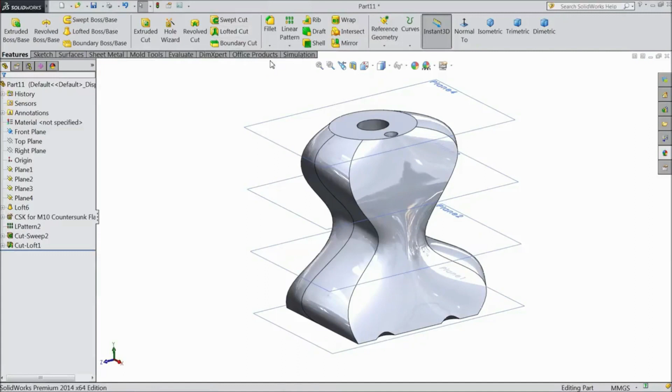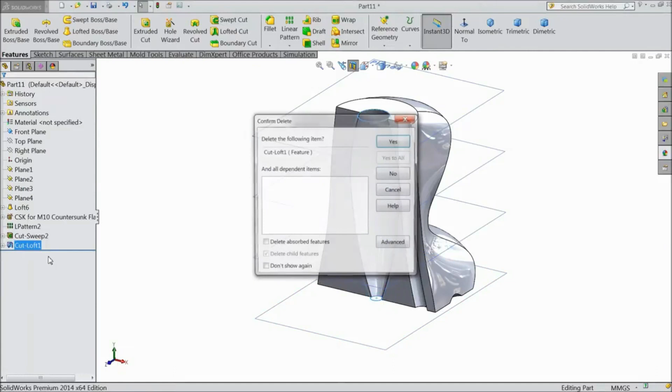Now we are going to see guided lofted cut. In the last lecture we created this lofted cut. Now we will see what is guided lofted cut. So let's see. First delete this lofted cut: right click, delete. Yes. Now we deleted this lofted cut, but our previous geometry is still there. We will use this geometry and we will see how to use guided lofted cut.

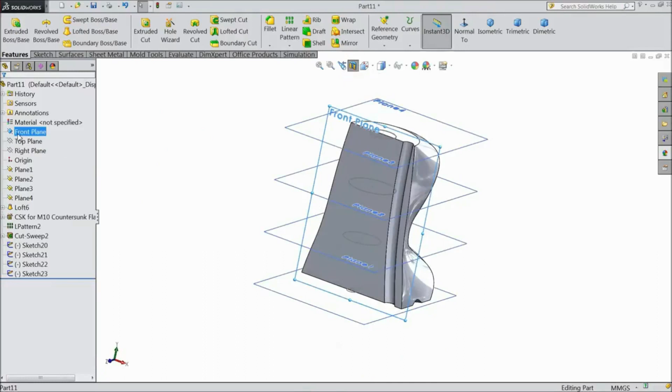So select front plane, sketch, select normal. Now select all these circles. First we will do one thing, hide all these planes. Right click and click here, hide. Now the circles are visible.

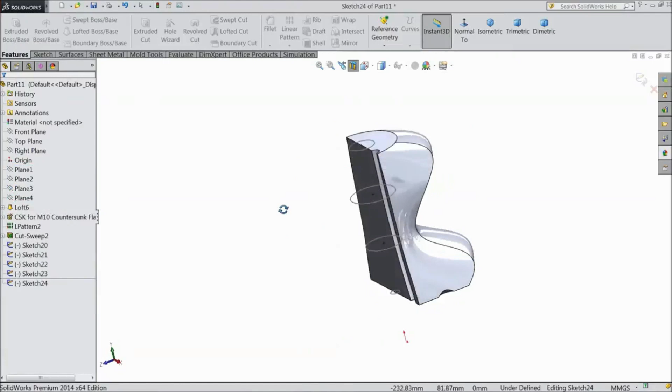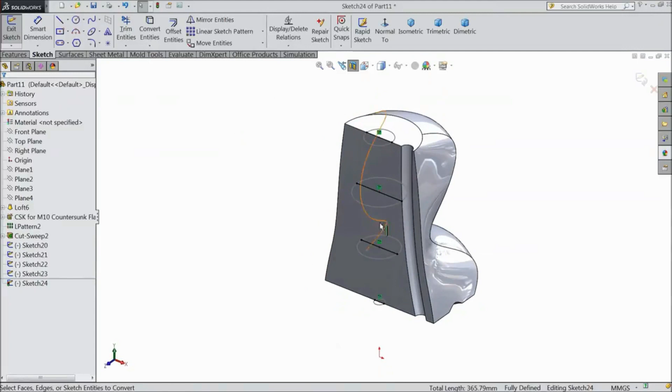Select normal and choose all the circles: hold the shift key and select all 4 circles together. Go to sketch and select convert entities. Now see, it is converted. Now select all the lines while holding the shift key and select for construction. We want to use them for construction purposes, so select OK.

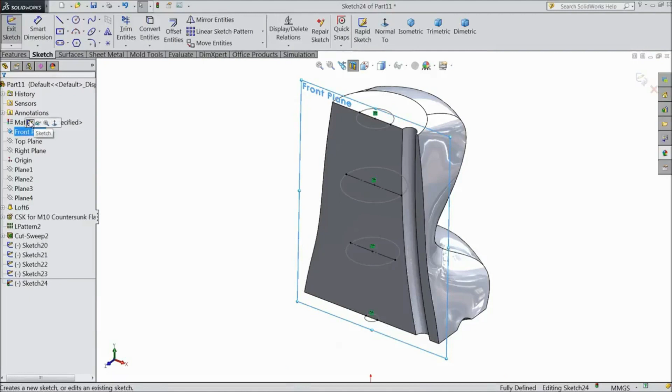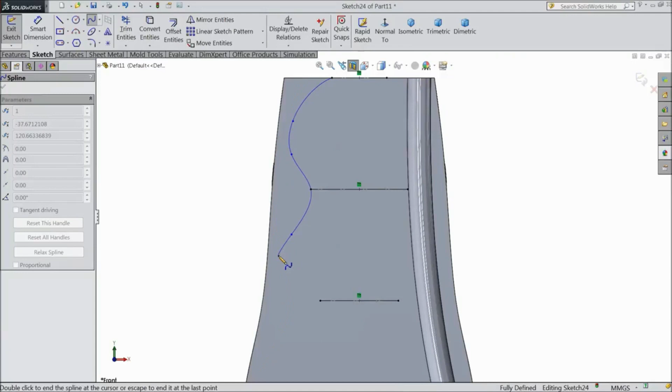Now again choose front plane. Okay, front plane is already there. So now choose spline and draw the path, whichever path you want to use. Now exit from the spline. So this is the spline created. We will use this path as a path for the lofted cut. So exit from the plane.

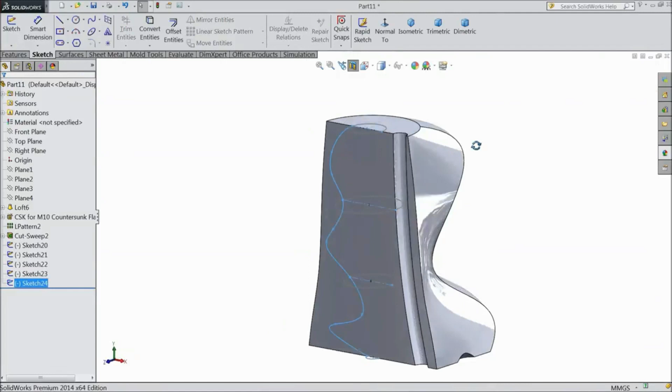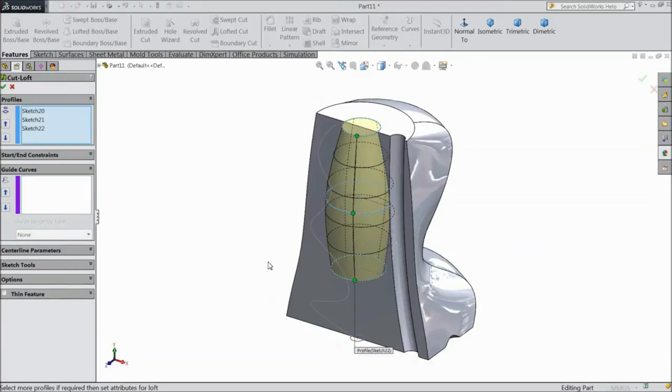Now see. Now we will go to features, select lofted cut. Now as the normal job, select all the profiles: first profile, second profile, third profile. First clear this selection, delete, and fourth profile. Now this is our standard lofted cut, but we created one spline here to define the path of

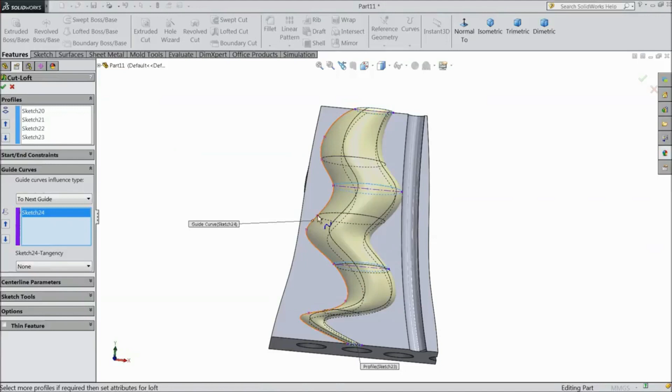the lofted cut. So this is the guide curve. Select guide curves, select the path and select the spline. See, our shape is going to take this path. Click OK. Now see, it is cut. It is very clearly cut.

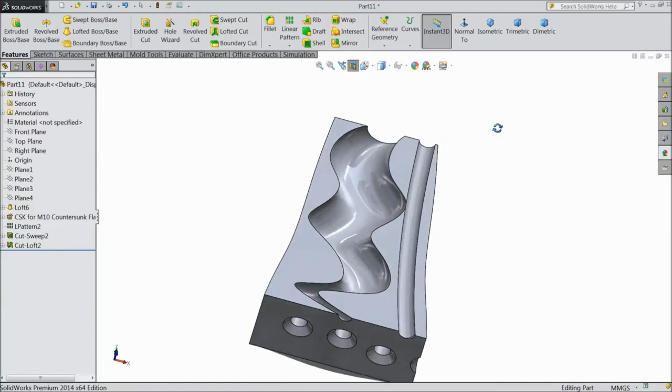So this is the chapter for guided lofted cut: how to use the guided lofted cut feature to cut any shape in a 3D model.